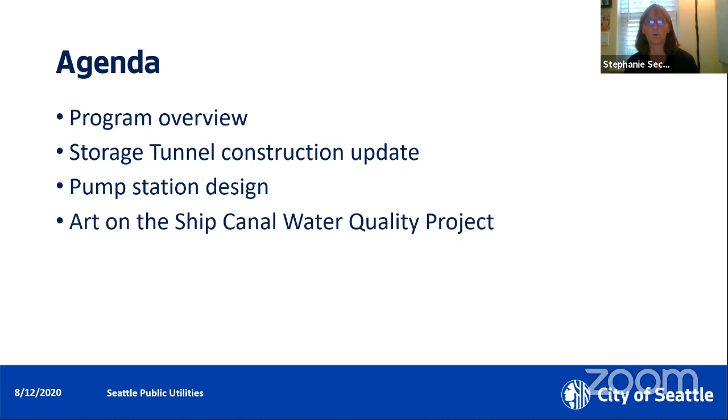So you can go to the next slide please. This is a schematic showing the current situation, where normally in dry weather we have a combined system, and without the rain the sewage just flows through the combined system and gets pumped to the treatment plant. But the situation is in heavy rains, we get a lot of storm water and it picks up the sewage. And when the treatment plant can't handle the amount of flows, we do get overflows into the Ship Canal. So that's the situation we're trying to remedy.

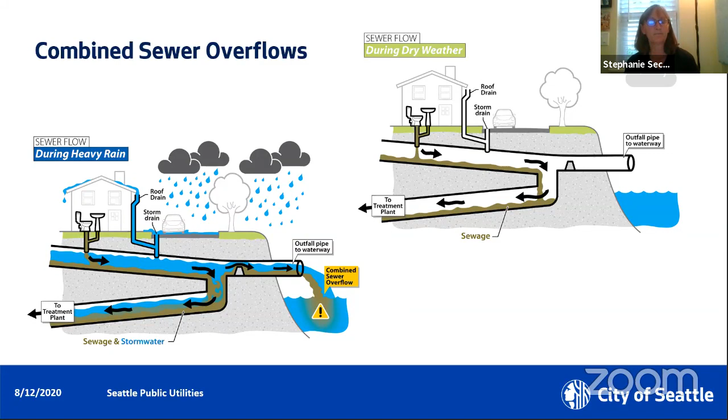Next slide please. When the storage tunnel is complete and the whole storage tunnel program is operational, this is the way it will operate: when we do have an overflow, it'll flow into the tunnel, which is the added circle at the bottom. And then when the treatment plant can handle the flows, we will be pumping the flows out of the tunnel to the treatment plant. There is still the ability to overflow, but that'll be limited by the size of the tunnel.

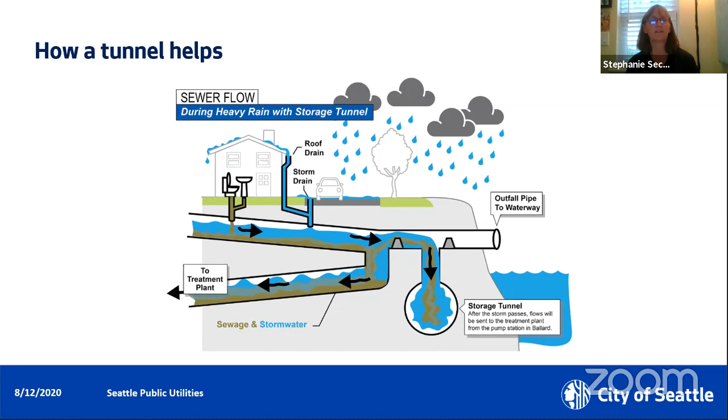Okay, next slide. So this is the basis of the program: what we're trying to remedy is keeping more than 75 million gallons of polluted stormwater and sewage on average each year from flowing into the Ship Canal waters. We are under consent decree with the Department of Justice, the US EPA, and the Department of Ecology. This is a combined project with King County. The green shows the King County basins, and the pink shows the SPU basins. The city of Seattle has 5 of the outfalls and King County has 2, so the cost split is 65-35 between Seattle and King County.

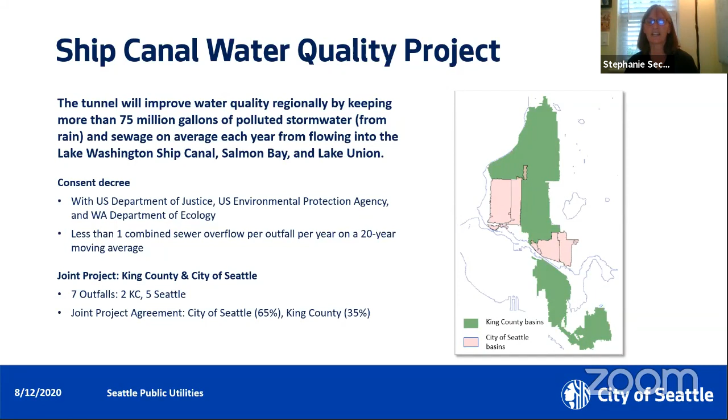Next slide. This slide shows the alignment of the tunnel, which is the long thin line from Ballard to Wallingford. The Ballard site is the hub where we will launch the tunneling machine, and it'll be tunneled to the east, passing through the shaft that will be built at the East Ballard site, the Fremont site, and ending at the Wallingford site.

And then we have 2 future projects to bring flows to the Wallingford site and to the Ballard site. Those are conveyance projects. Also part of the tunneling project is we include the Queen Anne site, and we will have another conveyance pipe that will bring flows from the Queen Anne site under the ship canal to the tunnel at the Fremont site.

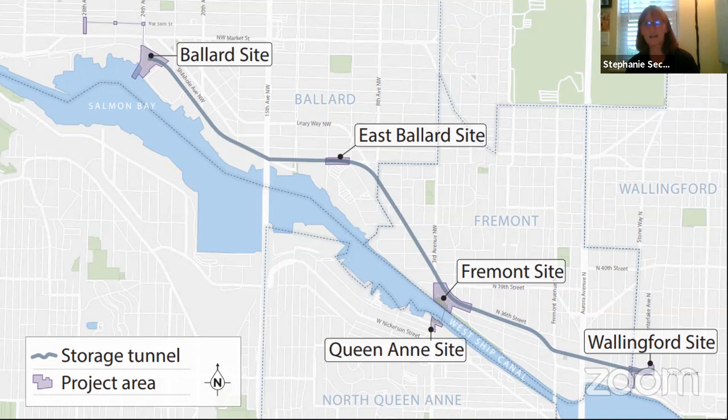So this is the Ballard site, which is kind of the hub of a lot of projects. We have the initial project, the Ballard Early Works project that we just finished last year, which prepared the site for the tunneling project to come next. Currently what you see out there is the tunnel project, building the tunnel, and in the future it'll be the pump station site as well. Then the third project is the Ballard Conveyance Project, bringing flows from the pipes to the tunnel through Ballard. Finally, in 2024, when we complete all the projects, we'll be restoring 24th Avenue Northwest.

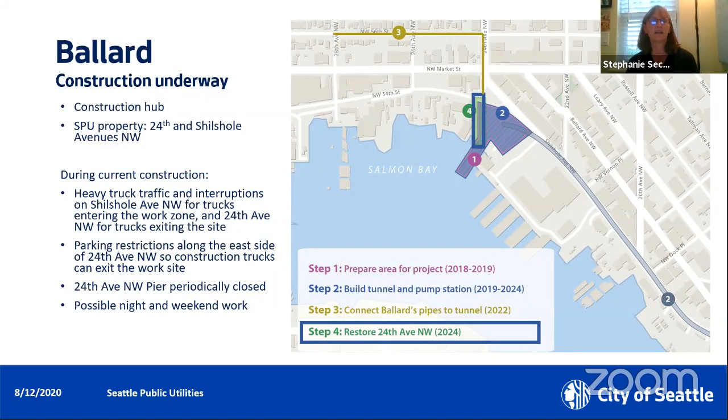So right now, these slides try to give an overview of what you see maybe from over the fence. The picture on the left is an aerial view of the launch shaft, which we are building. The first task is to build a slurry wall, a very deep cutoff wall. The idea is that it's ultimately going to cut off the groundwater flow into the inside of the tunnel so we can excavate out and have a dry excavation.

The machines you'll see are several cranes in the left picture. One is to pick up the rebar cages you see in the center picture, and the other two dig a series of segments. There are 18 different segments, and we do one at a time, staggered. Each segment excavation is 200 feet deep, then we fill the segment with slurry and drop in the rebar cage. The last task, on the right, is the series of concrete trucks. On a day where we're pouring a panel this size, there might be 80 trucks coming in, backing up 3 at a time. Then we pump the concrete down to the bottom, and it displaces the slurry to come out.

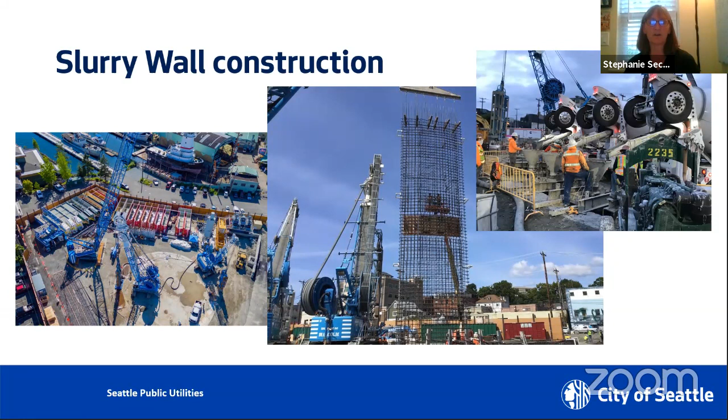So that's the main thing happening out there right now. We'll be done with this task in early September, and soon after that we'll be starting the excavation later this year.

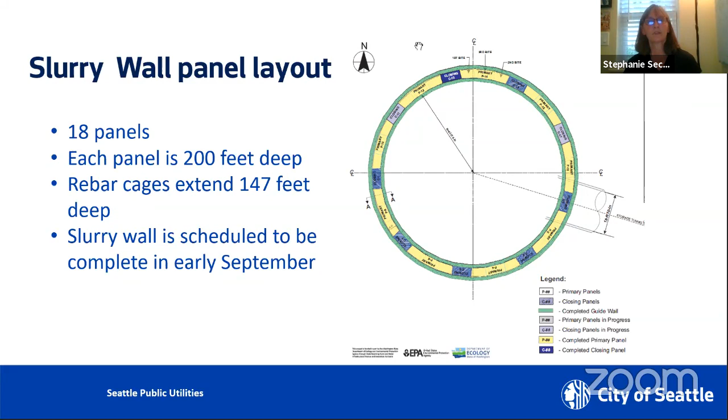When the tunnel comes through this area, we have to stop the tunneling machine and do some maintenance on it, and this provides more stable ground for that task. At the same time, we have to build a horizontal adit from the shaft built at this location over to the tunnel, work that's done about 50 feet below grade as well. So the jet grouting creates stable ground for that type of work. That's starting now in that area and will continue into December.

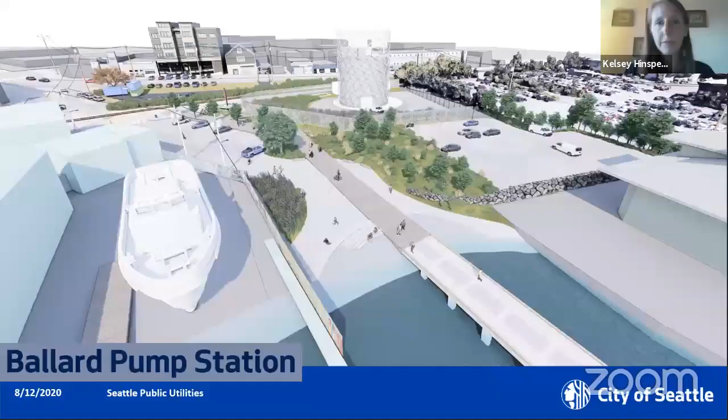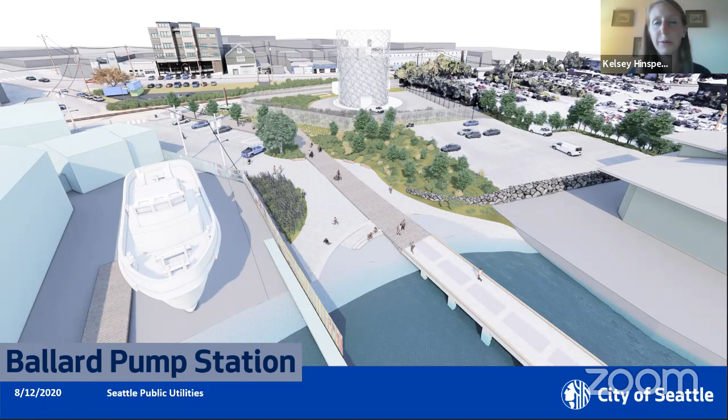This is a rendering of our current design concept. You'll see this cylinder right in the middle of the site, which we're calling the tower. It's meant to convey the underground shape of the below-grade shaft that Stephanie showed you, so the big idea was to communicate that same form above ground. It's clad in a metal facade to evoke the maritime and industrial nature of the area, and includes programmable LED lights that we hope to program to convey something about the pump station's operation or its connection to the weather. We're still mulling over different ideas there.

This area will be fenced, mainly so we can secure our assets and so our O&M staff can access it securely in an emergency or weather event. Along 24th Avenue, we'll be putting in parking along the east side of the site, along with an expanded pedestrian walkway connecting people down to the water. One of our big design concepts was to encourage people to come down to the water via a safe pedestrian pathway so they can enjoy the newly rebuilt 24th Avenue Pier.

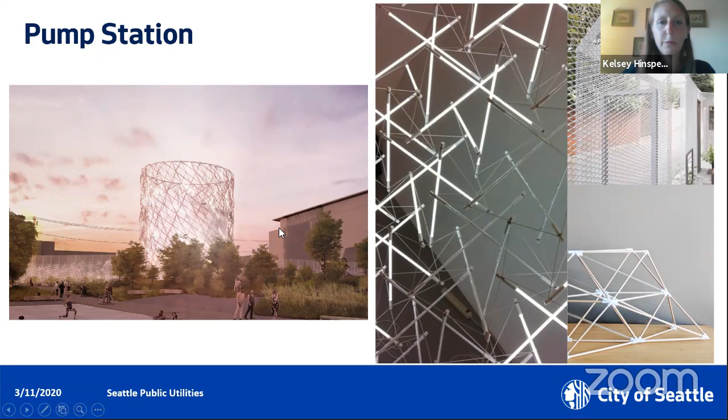Here's a bit more detail on the pump station concept. You can see these programmable LEDs, and again we're hoping to be able to illuminate the pump station. And here are details on the 24th Avenue right-of-way. We'll also be putting in some green stormwater infrastructure elements along the pedestrian pathway, to be both functional—treating stormwater runoff from the site and right-of-way—and educational, informing people about the connection between the weather, the people in Ballard, and the infrastructure that surrounds us.

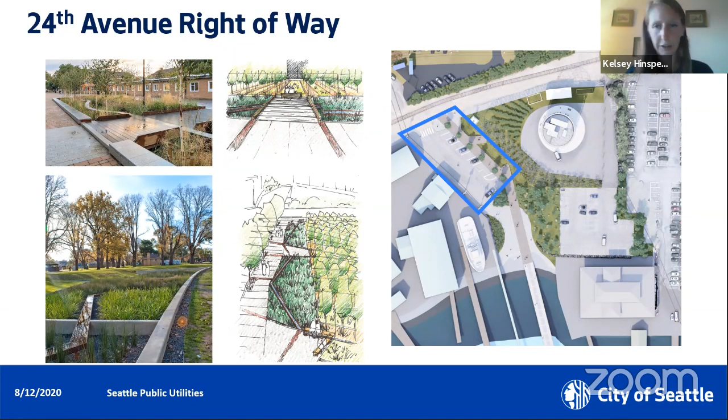The street end concept is really the outcome of our December public survey. We had four options, and the feedback we got was that most people responded best to a more flowy, natural-looking street end. So we arrived at a concept incorporating more curved lines and natural features. We have a hand-carry small craft launch area on the east side of the pier, and an accessible ramp for folks to access the water on the west side. We're also creating an expanded seating and active use area on the east side of the street end, to help activate the area.

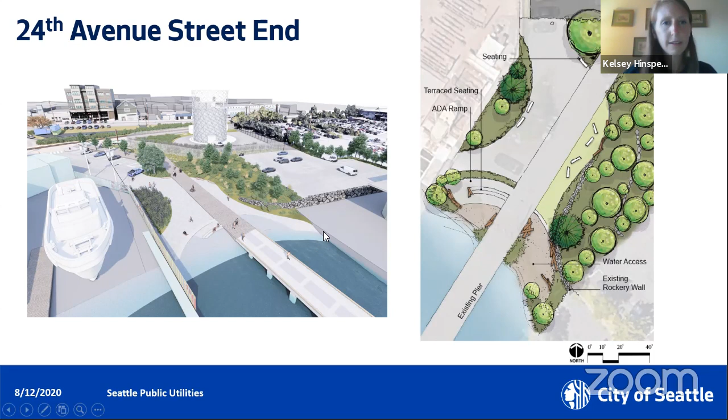And I think that is all I have for the pump station. So I'm going to pass it over to Jason now to give us an update on the programmatic art.

Unmute myself. Muted. There you go.

Thank you all for having us here today. My name is Jason Huff, I'm the acting director of the Public Art Program for the Seattle Office of Arts and Culture, and I'm joined here today by Jeffrey Vergay and Vaughn Bell. I want to talk about the artwork at the Ballard pump station, but also a bit beyond that, because a lot of what we're working on with SPU and the Ship Canal Water Quality Project is part of a bigger program we put together with Vaughn. A couple of years ago she was hired as an artist in residence and looked at SPU's drainage and wastewater management plan to develop an art plan that would sync with SPU's plan and guide our office and SPU for maybe the next 10 years on public art projects.

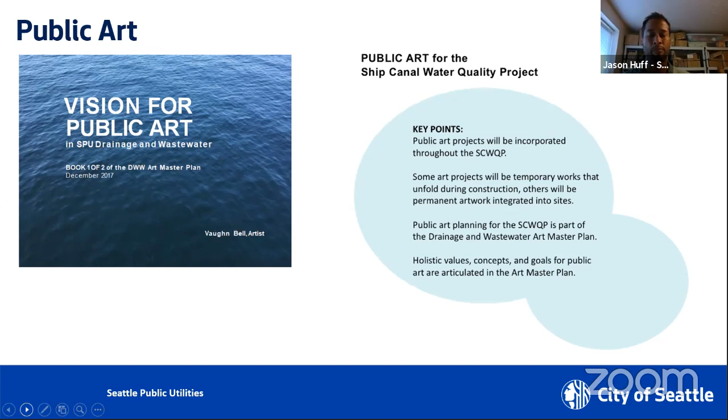And so the art plan really raises that awareness for folks so that they understand how their property, their street, affects all the waterways throughout the area. And so at the end of her residency, she developed a plan that we're now implementing through all different projects. Next slide, please.

But I think to focus here, and I want to speak more about the whole Ship Canal projects, we have focused on 4 project areas: number 1, the Ballard site, but also 2, the East Ballard site by the Fred Meyer. There's another site, number 3, in Fremont, and then 4, the West Shaft site in Wallingford.

And so for those 4 sites, we've developed 3 permanent projects, which are happening in Ballard, Fremont, and Wallingford. And then also at each of the 4 sites, we also developed a series of temporary artwork projects that are going to be part of the construction, and we've already started getting those implemented.

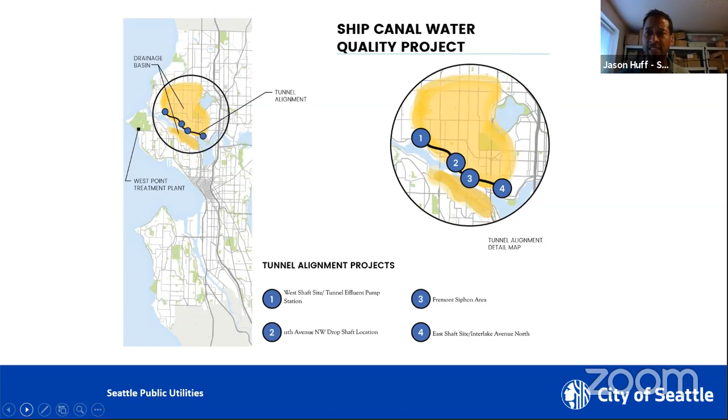And by next week, we'll have all 4 sites. We'll have artworks at those. Next slide, please.

So the goals for the public art were, again, to increase public awareness, make these invisible systems visible, connect people with the flow of water, really ask big questions about how we are connected with the water.

And really looking at public art and having a public face, making sure that as far as artwork, we're remaining contemporary with a lot of themes, but also really putting a lot of equity in the work, looking at systemic racism and how we can correct a lot of the wrongs that have been part of the status quo over decades and centuries. So we've been really trying to work on that.

And I think specifically with the Ballard site, given the proximity of where the Shilshole village was, we felt that the Ballard site would be a good opportunity for the city to honor that history and culture. And so we wanted an artwork that specifically spoke to Coast Salish history and culture. Next slide, please.

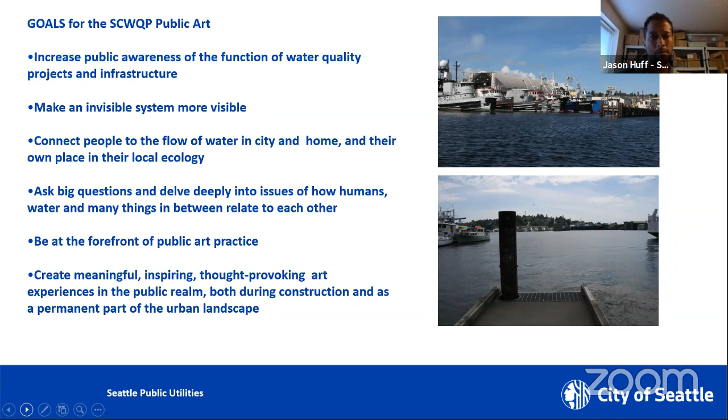So as I mentioned, we have a number of temporary artworks going on at the 4 construction sites, and we're calling the whole series Flow. The series will have artists installing temporary works at the construction sites for 6-month cycles. As mentioned, we just have 3 up right now, and the last one is going up next week at Fremont.

So we have Kaylee Nelson and Crystal Christopherson at the Wallingford site with their artwork MMIW, which is for missing and murdered Indigenous women. It's taking on 2 topics: one looking at environmental stewardship, but also looking at the issue of Native women whose crimes are going unanswered. That's up right now at Wallingford—I encourage you all to go by and see that one.

Minh Carrico will have a piece, TATTARRATTAT, going up next week. Katie Miller has her piece, Crossing, at the East Ballard site over by the Fred Meyer—along that gate, a number of little Tyvek boats are folded and incorporated into the chain link fencing. And here at the Ballard site, Angie Yusuf Hinojos and Carlos Jimenez created Chaac, the Maya god of rain, connecting with the theme of environmental stewardship with SPU. They have a frieze of 3 or 4 panels on the wall by the entry gate along Shilshole Avenue.

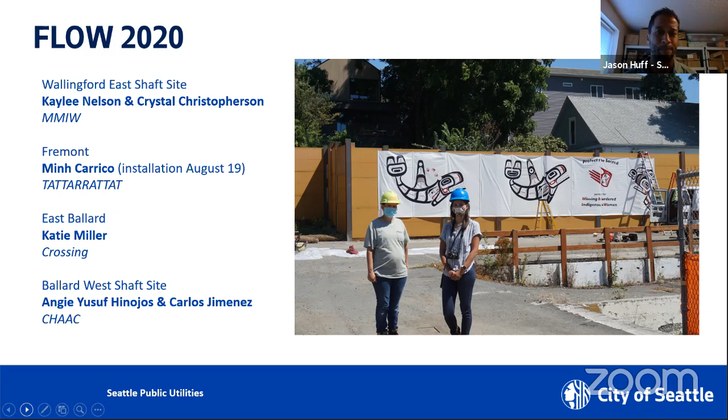For the Wallingford site, RYAN! Feddersen is creating the artwork Overflow, which is sort of a fence that she's creating. A lot of the imagery she developed came from her interactions with community groups through festivals like the Fremont Fair and the Ballard Seafood Fest, meeting with folks to find out the ways they use water. So you can see people brushing their teeth, there's a toilet flow, a number of different ways incorporated into this fence and these raindrops.

Preston Singletary and David Franklin are creating two artworks because the Fremont site is also Queen Anne. So on opposite ends of the ship canal, they're going to have these canoe paddles, depicting Petrel guards the water and Raven steals the water, giving this folklore of how Raven stole water from Petrel to create the water throughout the Northwest of the Salish Sea.

One of the things I think is pretty remarkable, and really something we're proud of at the city, looking at equity of how it turned out, is that along with the work Marvin Oliver did with Groundswell Northwest, which David was managing, we worked together on that. All 4 sites—Wallingford, Fremont, Ballard—have native artists working on these projects, so we'll have 4 native artworks along the ship canal. We're really proud that we're able to honor the history and culture of the Northwest.

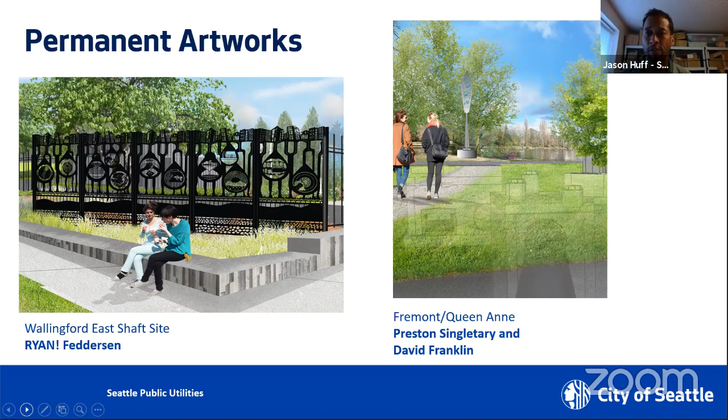At the site, Christian French has an artwork embedded into the pier called Sing Calypso. He created a poem, sort of a story about a fisherman who saves a fish, and then the fish returns the favor by saving the fisherman's life when he falls into the sea. On the left there is the Calypso, which was built right over there, and that site incorporated a nod to the Northwest maritime history.

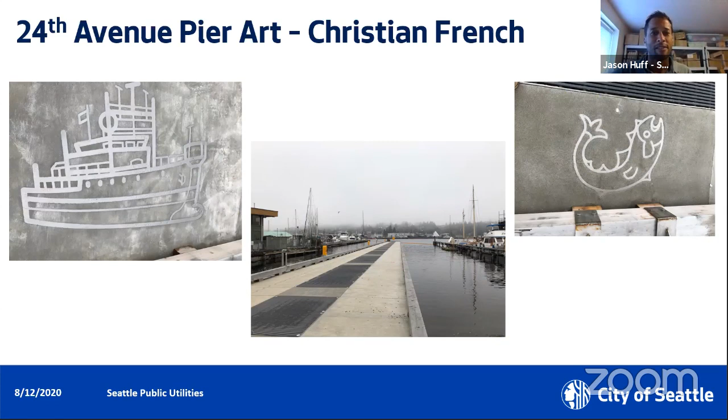We're thinking of all of these projects as one big program, and we're encouraging people to walk and bike along the Burke Gilman Trail to see all the artworks—today with Flow, and then in a number of years, all the permanent artwork. So Vaughn is here, and she can give a few points about the Connective Thread project.

Hi, thanks Jason. Yes, great to see all the images of all the artwork. The idea of the Connective Thread artwork is to create a through line to all of these pieces, and also to connect the idea of the macro scale, which is the Salish Sea, the big watershed we're all part of, to the micro scale of the sidewalk when you walk on it.

The final product of this artwork will be a series of inlays in sidewalks. There will be some sidewalks being reconstructed at each of these 4 locations, and there are some locations where the sidewalk inlays will actually be created by the artists who are creating the permanent artwork. For example, Jeffrey, who you're going to hear from tonight, will be making some that are nearby his piece, and then some that are in between.

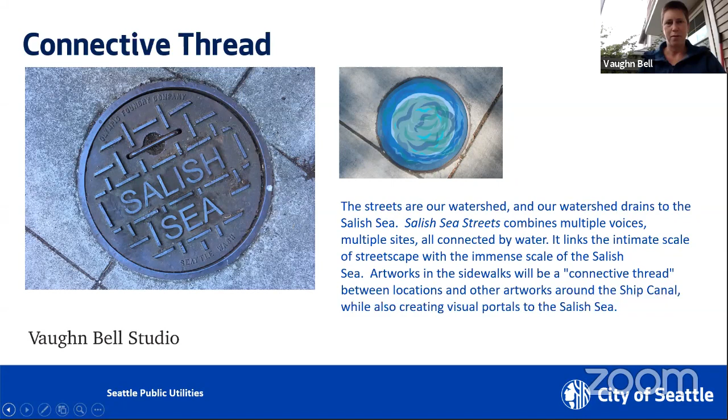I'm looking at this image you see here showing how it won't look exactly like this, but I'm thinking about the way infrastructure becomes very ordinary—we see it all the time—and how to transform that into something different that makes us think about our surroundings. So that's going to be part of the aesthetic of these pieces when they're finished.

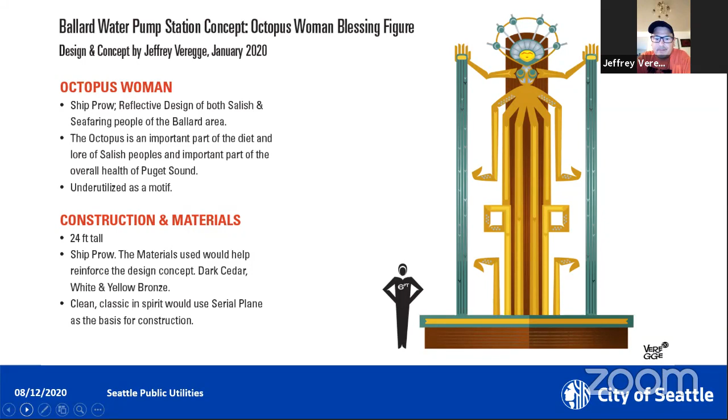Again, more of a look. Now, this design is in the concept phase. We've gone through a couple stages already. It's going to be much more dynamic. There will be more interaction on the backside with her legs wrapping around the pole, and we're working out some problems just to add some more bulk to the overall piece. What I want to do is create something that looks old and new, that you can't really put a finger on. It has an Art Deco feel to it, as well as the native elements that are from this region.

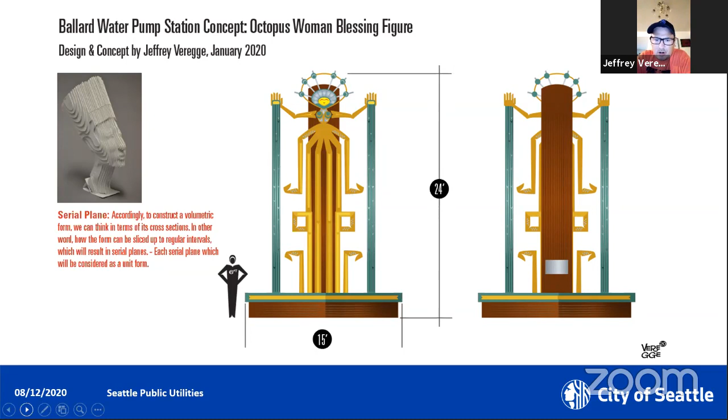And here you're looking at what it could look like, this version, what it would look like with the current design of the tower. She does come off as like a bow, a ship's prow.

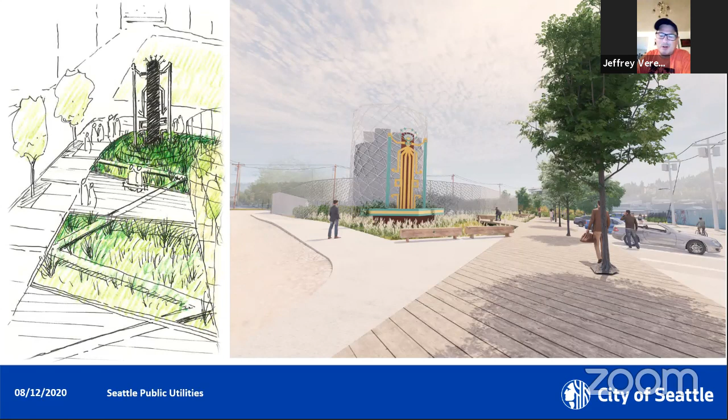Well, I think if you hear anything loud here, I apologize. My wife's in there watching the Mariners, so you might hear some loud cheering, or worse, if things aren't going so well. But thank you for your time. If there's any questions, I'd be glad to address them.

Thank you all very much. Jeffrey, appreciate that, and encourage you not to worry that we are a lot of Mariner fans in Ballard, but we've been cursing so long at that team that we've kind of given it up, actually. But hopefully our winning ways will someday resume.

I have a bunch of questions from varying folks in the audience. I'm going to try and give voice to them as quickly as possible. We only have about 8 or 9 minutes here on the agenda, but we'll try and get to it. I apologize if it feels a little broken up. We wanted to go through the whole presentation with both the engineering and functional facility side, and then the arts piece before we got into some Q&A. So it'll kind of be a little broken into things about each of those in order.

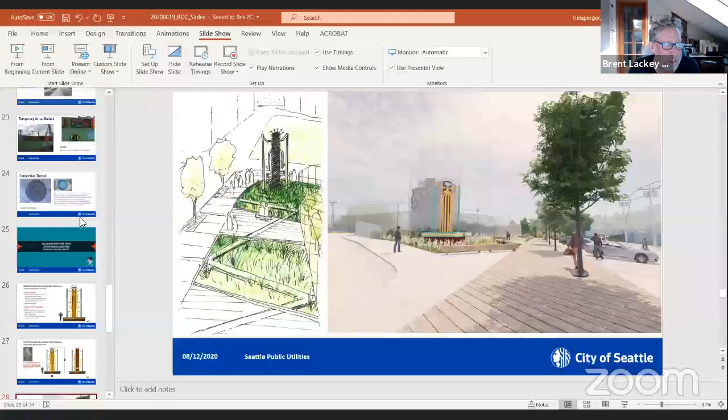Going to the facility part, there was some interest in what's really happening with the East Ballard site in the project. Specifically, some folks wanted to know, apparently there were a lot of ecology blocks placed around the postal annex, and they were wondering if that was related to this work or if that was something SDOT or someone else had done to prevent RV camping and on-street encampment that was happening. Wondering to understand the relationship between your East Ballard site and that stuff down there. And also wondering about noise impacts or otherwise impacts of some of the jet grouting going on down there.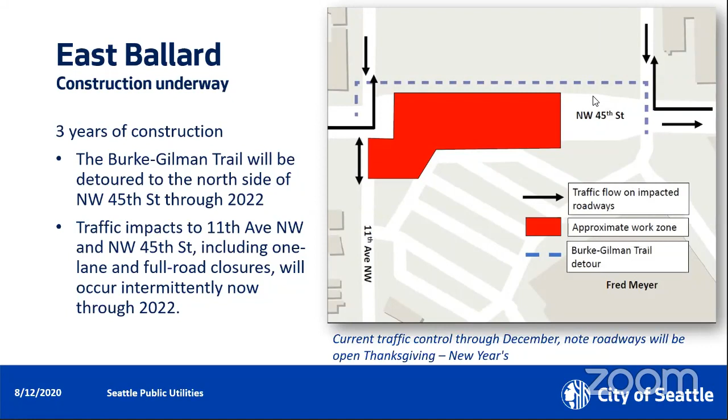Hi, this is Stephanie. So the ecology blocks, are we talking about the ones within our fenced area? Are those the ones in question? The ones inside our fenced area are to create a pond for managing the jet grout waters that are part of the jet grouting operation. I don't know if there are other ecology blocks elsewhere. I'm sorry, I couldn't be a little more specific about what that question really meant. If you go to the next picture, I think it might show some of the ecology blocks. Oh yeah, so where the black plastic is draped over, that's just to create a pond. That's helpful.

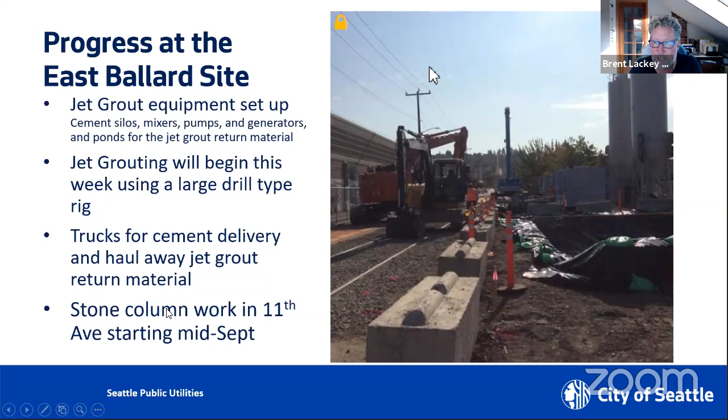The next question was about parking at the primary Ballard site. Kelsey, do we call it the Ballard site? What do you call the main site? You can call it the Ballard site. I just want to get the nomenclature right, but folks are wondering about what's happening there with parking, with access to the water. There's concern about there only being about 50 or 60 feet wide of shoreline access where the site itself looks to be hundreds of feet wide, and why isn't there more? Can you address some of the park-like function there?

Sure, maybe this view would be better. To the first part of the question about parking, the public parking that we're providing is going to be mainly along the east side of the right-of-way. Then on site, we'll have parking for SPU vehicles, but since that area is secured, that's not going to be public parking. In terms of what we're providing for shoreline access, it's really what's shown in the rendering. This area is the area of public right-of-way, so that's why we're prioritizing public use and public space on the project there.

But I think part of the question was, why isn't the project doing any shoreline access on site? We actually don't own the area directly adjacent to the water on the private parcel area, and so I don't think there really is much opportunity, at least for SPU's parcel, for shoreline use. Does that answer the question? Yeah, that gets to it for sure.

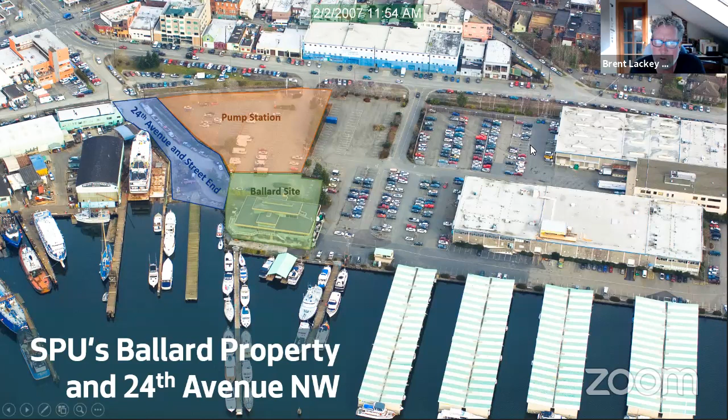Okay, so folks can understand, is the long-term disposition to have the whole pump station fenced off from the public? What's the plan for access? It seems like there's a chain link fence just around that one part. Is this true to the rendering that there's going to be vegetation where we see it, or is that still conceptual? What's happening with all the vegetation? Yeah, you are right, there's going to be a fence surrounding what we like to call the operational yard area of SPU's parcel.

A big reason for that is so that the area is secure in the event that O&M staff need to get in there and need to have access, potentially 24 hours, to be able to operate our equipment. There is a large area of landscaping within the fenced area.

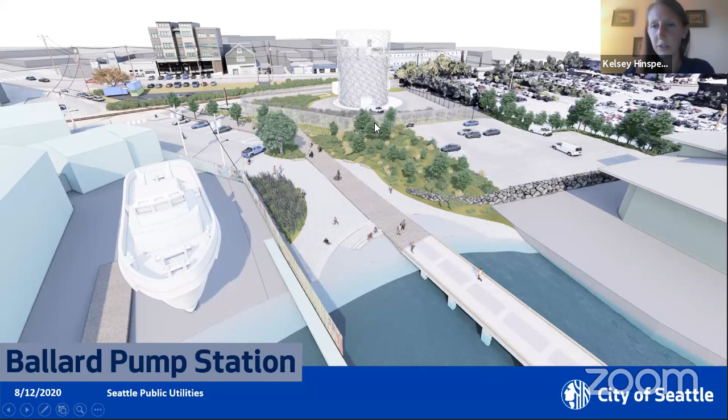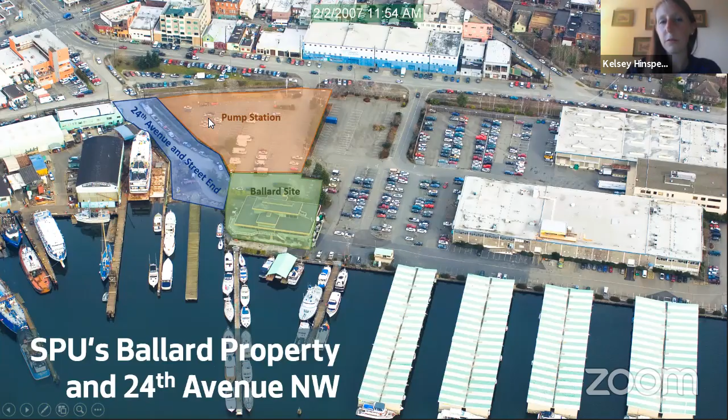SPU is doing some long-term planning for the use of the site past when Ship Canal is done, for a potential future project that might include the southern part of the site, the green area, and a swath along the west edge of the site. That really is the reason there's landscaping here and that it's fenced — SPU is reserving that space for a potential future project.

But we don't yet know what that is, and it's well outside of the Ship Canal timeline and scope. In fact, SPU has said they're not going to put any resources toward planning for that future project for another two years at this point.

Why? Mainly due to resources — there's no resources for staff or a project there. And in the current financial climate, we're delaying it for a couple of years.

We'll just count on you to keep closely coordinated with us and others in Ballard as that moves forward, because we have a keen interest in anything publicly accessible down here, and also a real concern about how the site is going to interface with the encampment issues already present and abundant at that location.

We're running out of time, so let me make sure I capture any last questions. There were a couple of things about the artwork I wanted to express. People are wondering — and I think this is a great question — are people going to be able to walk right up to the octopus woman? You can kind of see on this slide where we are on the sculpture, but could you talk to that issue? People think it's a really beautiful theme, and there's a lot of positive feedback, Jeffrey, about the piece, the concept, and the ideas behind it.

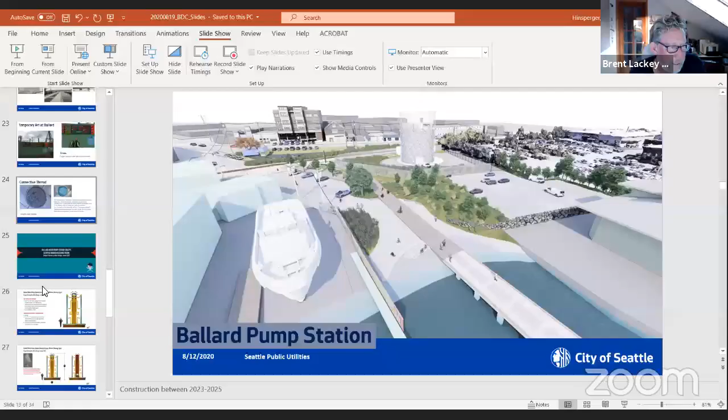Yes, we are looking at different ways to do it to make it so people can walk up closer, which is why we're going to have to make some adjustments to the design.

If you want to see some of my artwork right now, you could go to the Citizen M Hotel in Lake Union — they have one of my murals there. Snoqualmie Casino, I designed their VIP entrance mural, completely wraparound. I'm working right now on a mural for the new Climate Pledge Arena for the Kraken. And you can also go to Auburn, to the Muckleshoot Tribe — I designed the artwork and the water sculpture there for their Veterans Park.

There's also plenty of places online — the Smithsonian is another place. Excellent, thank you very much.

Excellent answer. We're basically out of time — I don't think we could finish answering all the questions that come up from this short 45-minute presentation, even if we used the remainder of it. A great introduction to the project from you folks, and I think it evidences that we're going to need to stay in touch and have you back for certain different elements moving forward.

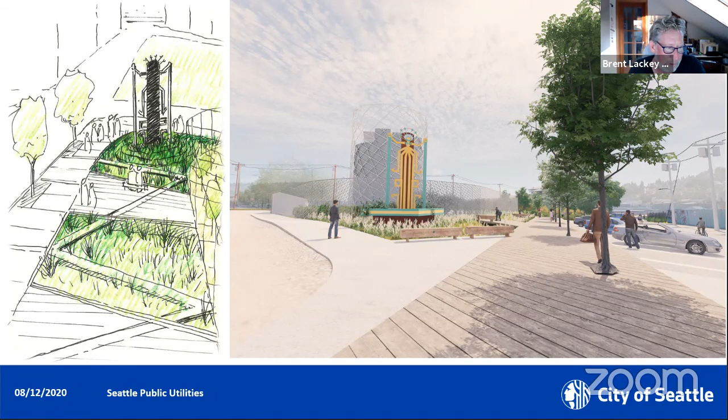Going to jump over now to Dave Boyd. Dave's been a long time participant in lots of land use planning and parks and open space, community activism in Ballard and in the city of Seattle, and is going to talk on behalf of a nascent group of folks who are calling themselves Friends of Ballard, Downtown Ballard Waterfront Park.

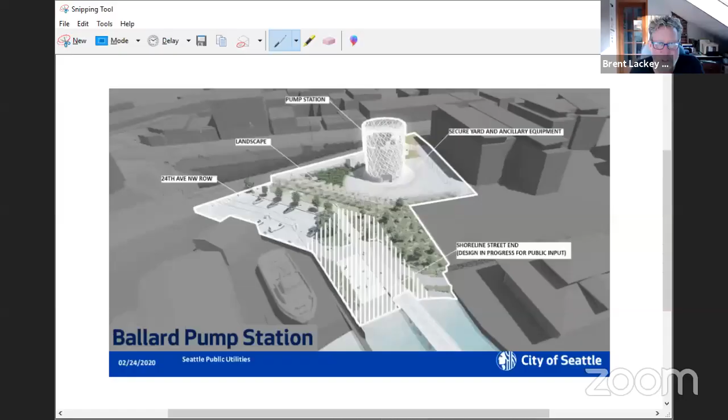Dave, I'm looking for you on the Zoom call here. I'm here, it won't let me start my video because it says you stopped it. Oh, I didn't mean to stop it, let me see if I can turn it on for you. No, that's not what I want. It says you're screen sharing now. Yeah, I clicked on the wrong thing. That's okay, bear with me just a second here.

So we are a very informal, loosely organized group at this point, and we are very thankful that you gave us this opportunity to share some thoughts that we're developing. This is all very early draft work. We've been meeting since before the pandemic, and we participated in SPU's open houses and also Design Commission and Parks Board meetings to discuss what we see as a really once in a lifetime opportunity for Ballard. The group consists of, I'm active in Groundswell Northwest, and there's also representatives of the Central Ballard residents, Stimson Marina, Friends of Street Ends. So we're certainly interested in getting other input as we move along.

So Dave, I'm seeing a screen on the share that looks like your Microsoft snipping tool, wanting to know if you want to save changes. So we're not seeing your final picture or presentation. Okay, now it tells me the screen sharing has stopped, let me try one more. Is that better? Not seeing anything just yet. Okay, try again. I think it depends on which screen you're actually showing, perhaps. Let me escape from this one. I was going to ask in our pre-session whether you wanted me to give this a trial run, but I probably should have. Bear with me, not a problem. Try one more time here.

There's your Zoom window, so we're seeing your web browser. You don't want to see my email. No. Hey Dave, I've also got it pulled up, I could probably share it if you want. There we go, nice, okay we're seeing it. Okay excellent.

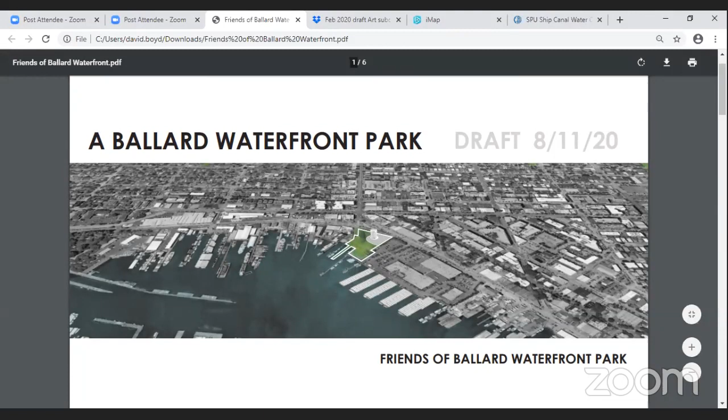So this presentation, I want to give kudos to Zoe Kasperzik for working with us. This is an all-volunteer group at this point. I'll run through it pretty quickly since I fumbled around quite a bit there.

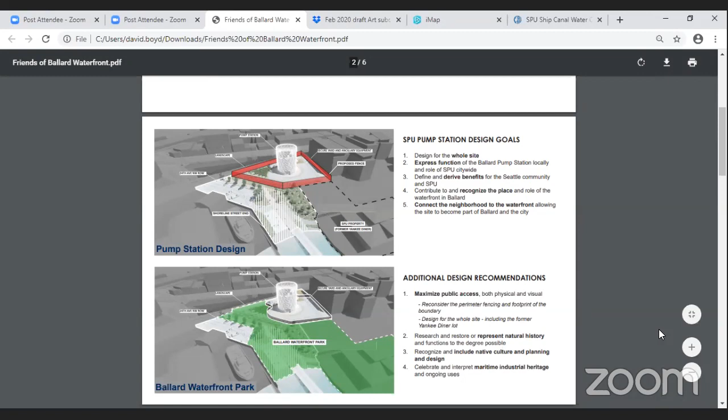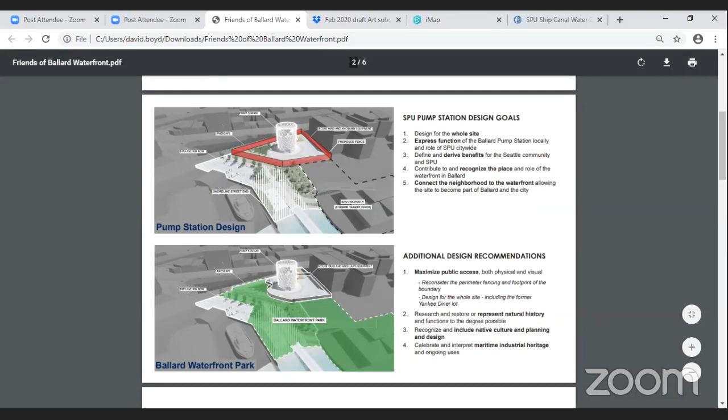So our main focus is to maximize the opportunities for public open space at this site. On the top here we have the pump station design and the design goals, which we think are great, and we've appreciated the opportunity to work with SPU on presentations they've made on the project. We suggest some additional design recommendations to maximize public access, and specifically to reconsider the perimeter fencing, the initial perimeter fencing, to maximize public access. Building on what SPU is doing in terms of connecting with both the natural history and native culture on this site, and also celebrating the maritime industrial heritage of the area.

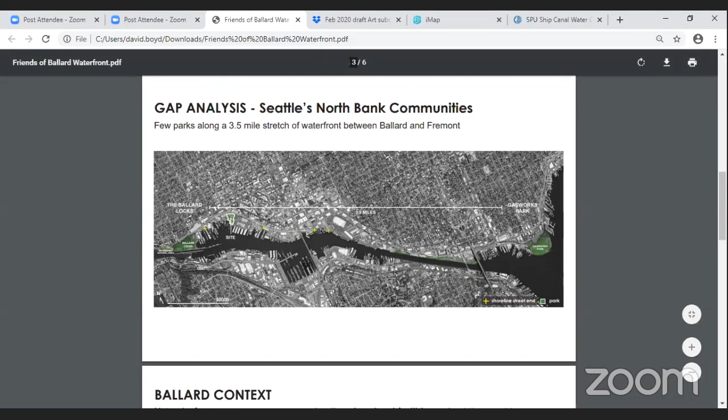We're looking at the broader context. This is partly a recognition that there's limited access to the shoreline between Gasworks Park and the locks. Between those two parks there's Fremont Canal Park and then a series of shoreline street ends in that area. So this really is a unique opportunity.

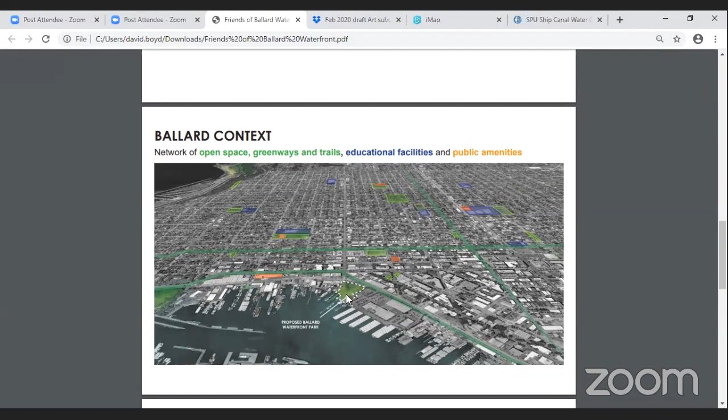A little bit of Ballard context, where this site fits within that context. You see the parks and greenways and trails in green, educational facilities in blue, and the other public amenities in orange. And then the site itself, and we really think it's important to look at the site as a whole, including the Yankee Diner site and the adjacent sites. Stimson Marina is looking at plans to redevelop, and they will be required to provide public access, so there's an opportunity to tie that in with what happens on this site.

And also to look at the connections from this site to the core of Ballard, to Ballard Avenue, to Market Street, and really make sure that this is really tied into Ballard very well.

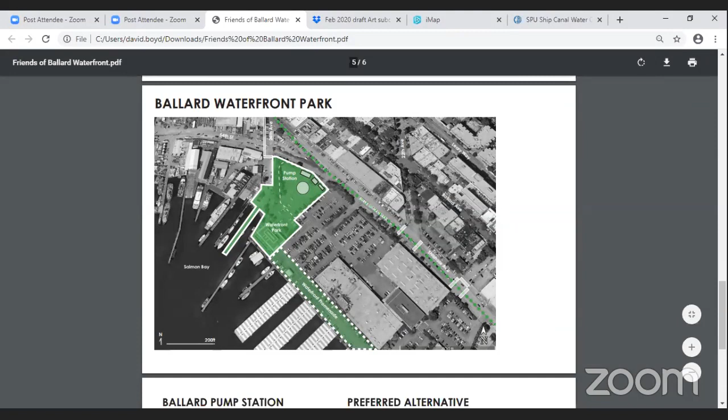So the final image here is just the SPU proposal that does fence off a large area of landscaping. I do appreciate that they're considering future uses that might make that more public in the future, but we would suggest that from the get-go, let's move the fence back so that area can be public space, with the understanding that the uses could evolve over time.

As we move forward, really make sure that all the decisions that are made don't preclude use of that public open space on the pump station site and the use of the Yankee Diner site as public open space. So in a nutshell, that's what we're about, and we're looking forward to working with the city and trying to realize as much of these opportunities as possible.

Thank you, Dave. What have you done with the city? Where is the interaction with the city? It seems like most of this lies in a handful of meetings that need to start happening yesterday between SPU and some of the folks that have gotten involved in this.

Well, SPU has come and Kelsey has presented at a joint meeting of Groundswell and the Friends of Street Ends. We participated in their public open house and have spoken about this when it went to the Design Commission. We intend to also comment on it when it goes back to the Design Commission this fall. So that's outreach to the city. We're also looking forward to doing more outreach within the neighborhood, to check in with other stakeholders and get their input on these ideas.

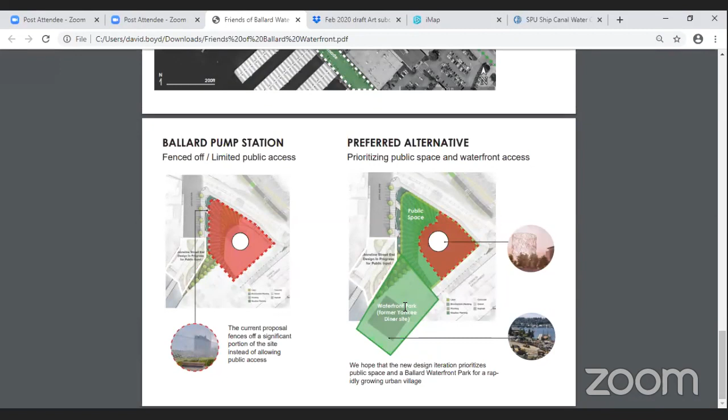Excellent. I certainly know I've had several personal conversations with people saying, why don't we have something more like the Agua Verde cantina and kayak club thing over in the U District near the UW hospital. Folks really would like to see something more active happen down there along the waterfront.

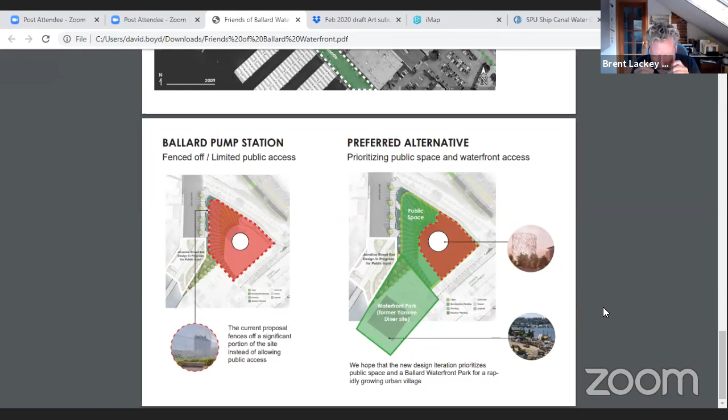You mentioned, but I don't think I understood, what's the relationship between the folks at Stimson Marina? Are they kind of part of this now? Yeah, they've been a participant in our group, and they do have long-term plans for redevelopment on their property, which will require public access, so they'd like to make sure it's integrated into this. They're very much in support of the idea of a waterfront public space at the Yankee Diner site. They actually built that building years ago and sold it to the owners that sold it to SPU.

One other point I forgot to mention is this has been on our radar screen since the mid-90s, when we did our Ballard open space inventory, and one of Groundswell's original founding board members was part of that and pointed out that the Yankee Diner building sits directly on the axis of 24th Avenue Northwest and blocks the view down 24th Avenue as far up as 75th Street. So opening that view up to the water is important as well.

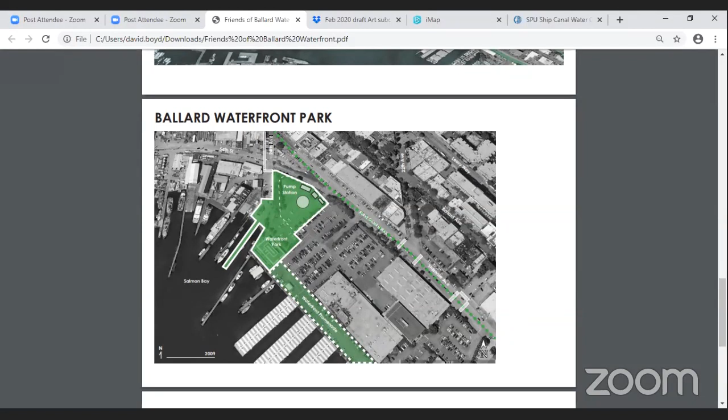Okay, very much appreciate a quick look at that from you, Dave. I think folks are going to be really interested and excited to keep hearing and seeing more about this moving forward. I know that Groundswell Northwest has been a very strong and solid member and participant of the Ballard District Council for many years, so really appreciate your taking the helm on a piece that's as central to Ballard as really anything we've talked about in terms of parks and open space.

So hopefully we'll at least get you to push the fence back a little bit there, Kelsey. We'll keep trying, and we'll keep the conversation going forward on this, Dave, as much as we can.

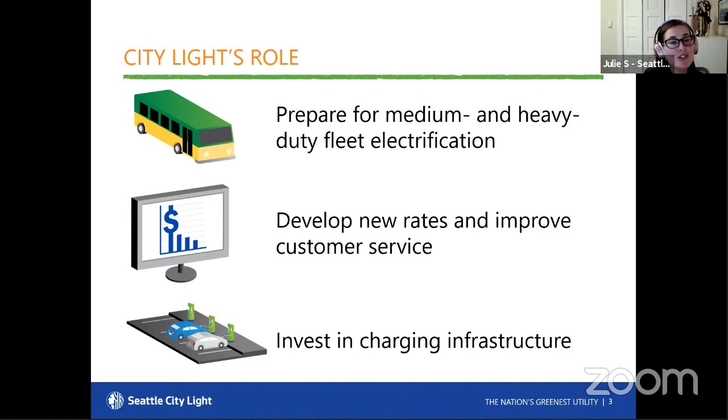So when we did this report and shared it last year with a number of stakeholders, we got some really important feedback that we needed to prioritize environmental justice community engagement in developing the strategic plan that we're sharing with you today, to make sure that how we're prioritizing and investing in our different transportation uses reflects their wants and needs as communities that have the largest barriers to transportation electrification. And our philosophy throughout this entire community engagement process has been, by meeting and centering with those who have the largest barriers, we'll be able to design solutions that meet the needs of all of our customer owners.

So a little bit of background: at the City of Seattle, we define environmental justice communities as those communities who have been most impacted by environmental inequities, including communities of color, immigrants, refugees, people surviving on low incomes, young people, and folks who communicate with limited English proficiency. As a utility, we are committed to working with these communities to increase familiarity with electric vehicles, reduce barriers to access through utility programs, and really maximize benefits and minimize harms. We've known throughout this process and through that feedback and learning from it that centering equity in ongoing planning efforts is really critical for making sure that we have a successful transportation electrification transition process.

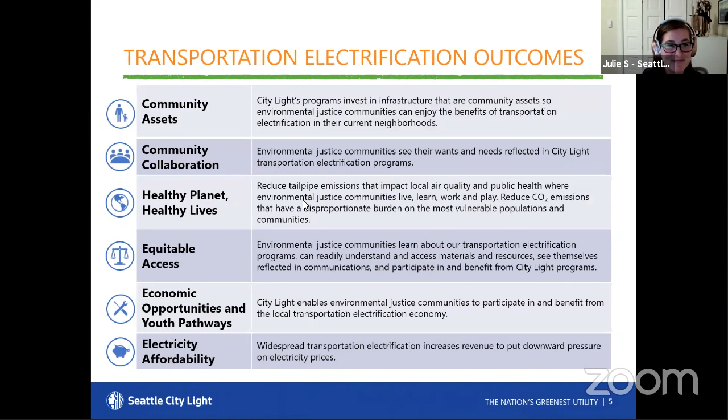We learned that many of our environmental justice community members are unfamiliar with electric vehicles, and even more so, when people are familiar with electric vehicles, the advertising tends to leave out people of color and really focuses on white single occupancy vehicle owners.

Community leaders shared that communicating in multiple languages, highlighting communities of color and their artwork in advertising, and focusing on multimodal transportation electrification can increase equitable access. This term multimodal isn't just focusing on cars, it's focusing on buses and trains and all the ways that we all get around in our life.

The second priority ties in well with that multimodal point. The number two priority that kept coming up behind education is to prioritize buses for electrification. This encompasses all of public transit, but the thing we kept hearing throughout was prioritizing buses. We learned that environmental justice community members are more likely to depend on buses for most, if not all, of their transportation needs. Electrifying public transit will benefit communities who rely on it by reducing air and noise pollution where impacts are greatest for them.